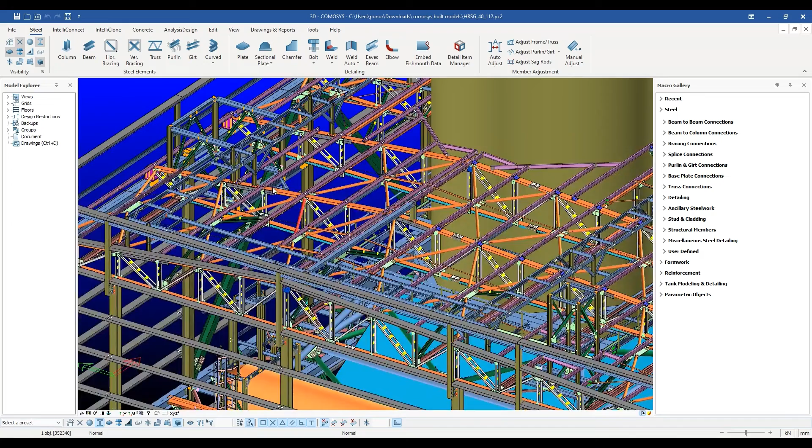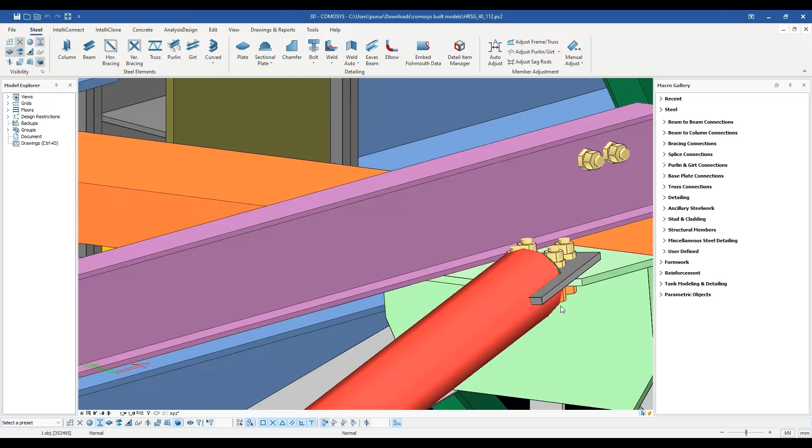Steel profiles are seldom used directly as they are bought from the rolling mills. More often than not, the profile ends will need to be cut, notched, coped, fitted, and sometimes openings need to be cut out from the webs.

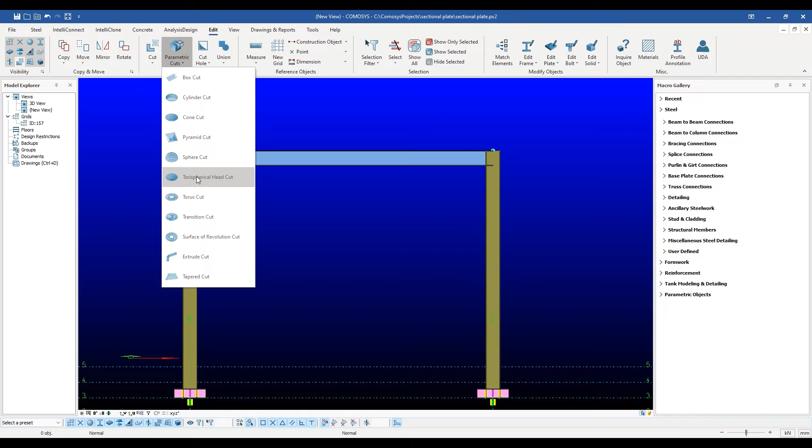In COMOSYS you will find an extensive array of commands to make the tasks of cutting steel or concrete shapes easy. These can broadly be classified as polygon cuts, fittings, part cuts, and general parametric cuts. In this video we will be talking about polygon cuts.

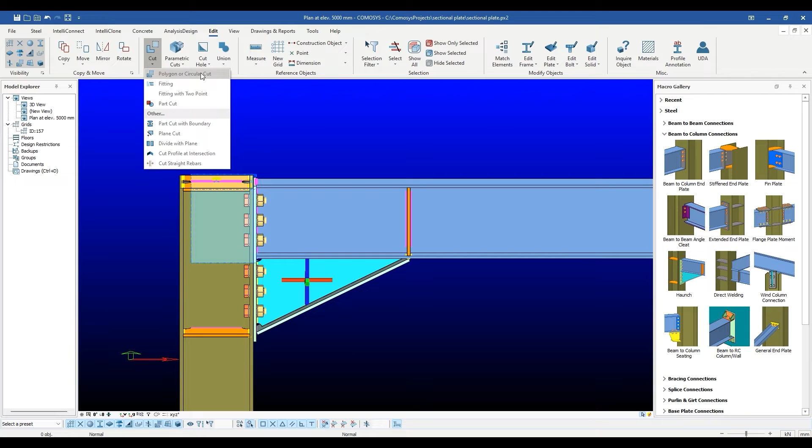The polygon cut is basically an extrusion cut of a general polygon or a circle. Let's say we want to create a notch as shown in this figure. We start the command by clicking the polygon cut icon.

A form opens up with an option to create a polygon cut or a circular one. Let's choose the polygon cut option. There is a depth variable here which tells COMOSYS how much this polygon will be extruded on both the plus and minus directions of the plane created by the selected points.

Enter a number which is suitable for the notch. Since we are trying to create a notch for the top flange here, with a notch depth of 40 mm, we can enter 40 here.

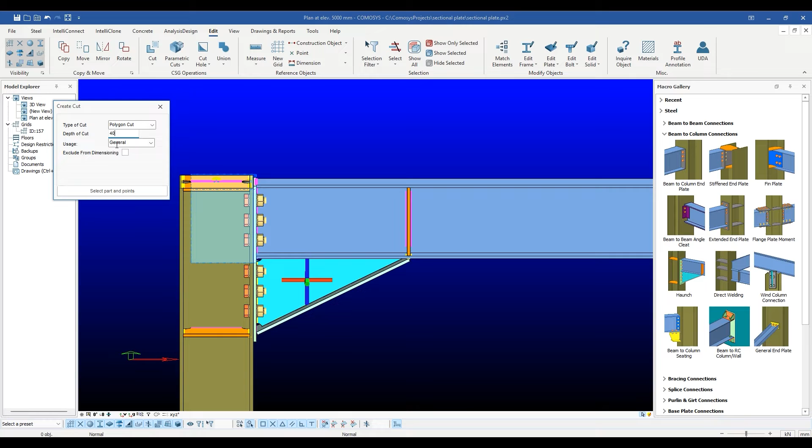Once we are happy with the settings, we press the Select Part and Points button. COMOSYS proceeds to ask us to select the part which needs to be cut. You can always look at the status bar below to read the prompts of various commands.

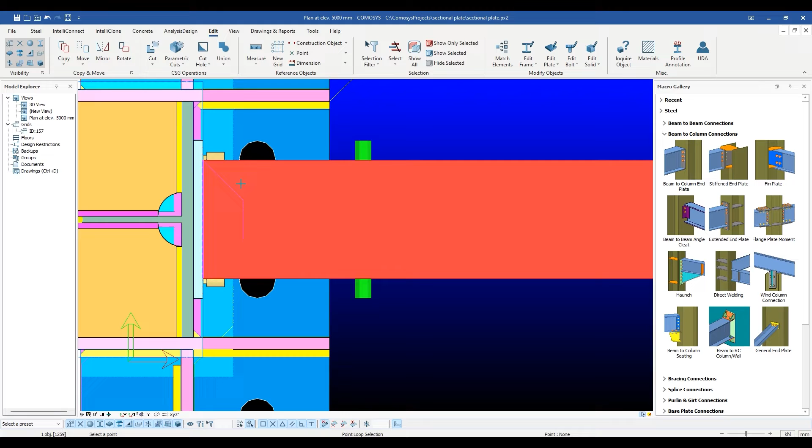After selecting the part which needs to be cut, the user needs to select some points. These need to be at least 3 in number. In our case we need 4 points. 2 are directly snappable on the part itself, and the other 2 can be snapped to using direct entry techniques, so no need to create these points. Just select them and then select the first point again to finish the selection.

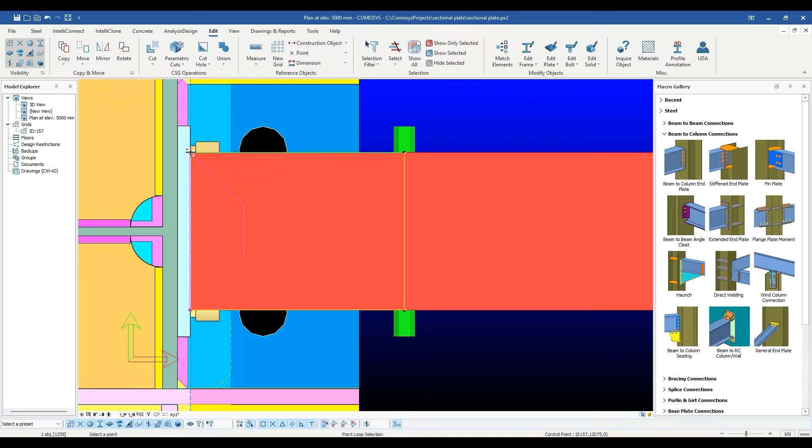It is easy to imagine how this command can be used to make a hole in the web of the profiles, or for cutting basically any polygonal shape out of the material. As can be seen, an actual cut object with blue lines has been created by COMOSYS.

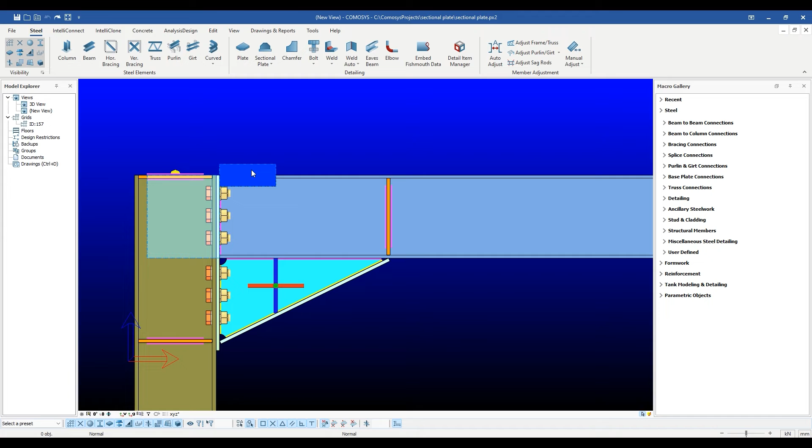This object can be selected and deleted if needed. The profile will revert back to its original shape. But more importantly than that, this cut object can be copied.

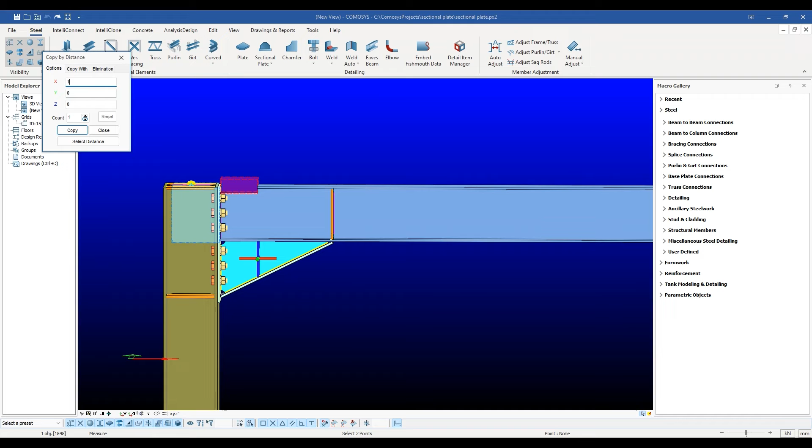So if we were to copy this cut object a distance of 1000 mm along the beam, we would create another cut object at that distance.

The cut object can also be copied to a different part. For instance, if we were to copy it to this point, where a different I-beam is waiting, the copied cut object would find its new owner and attach itself to it.

This feature of finding new objects to attach to is extremely powerful, and will be discussed in more detail in the video about copying, rotating, and mirroring objects.

Now let's try the circular cut option. In this case, the user is required to choose 3 points.

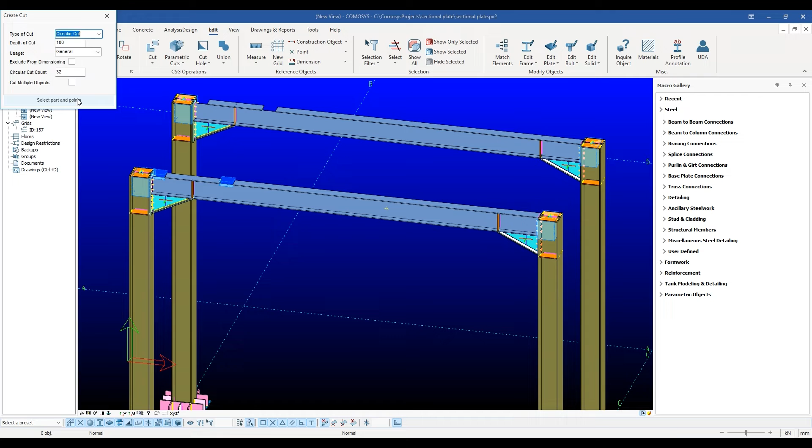The first point represents the origin of the cutting circle. The second point represents any point on the boundary of the circle, while the third point will define the plane of the circle.

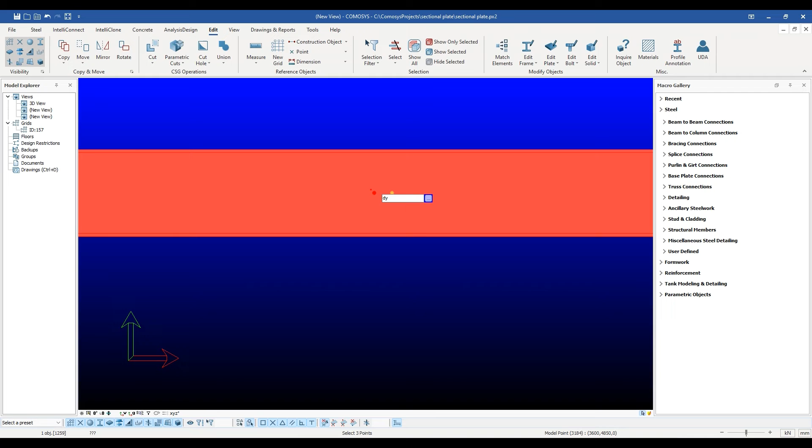There is also a section count here, which defines how accurate the circle will be. Usually a number around 32 gives a good result, but it should be noted that smaller numbers like 5 or 8 etc. can be used to create pentagons and octagons etc.

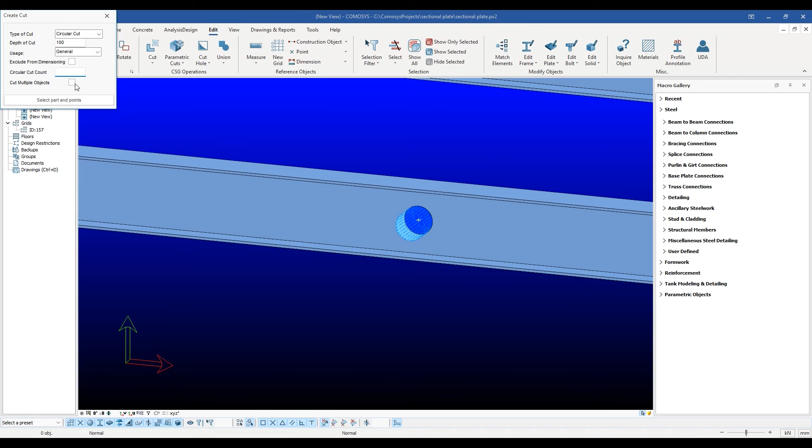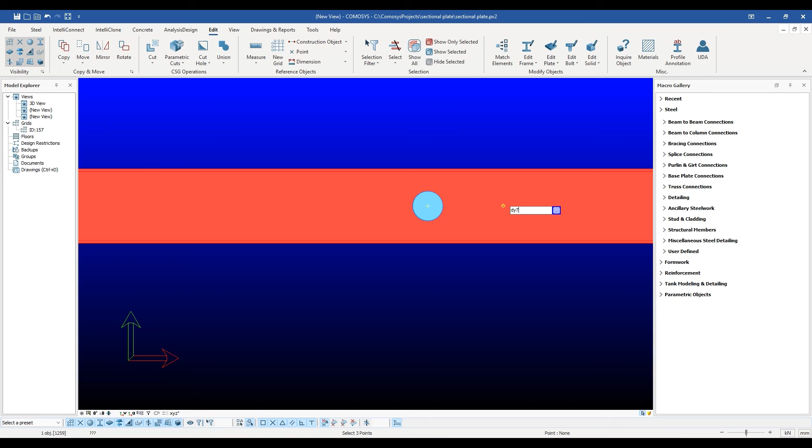Let's draw a polygon here by using the direct entry method. The choice of P2 will also define the rotation of the pentagons or octagons etc.

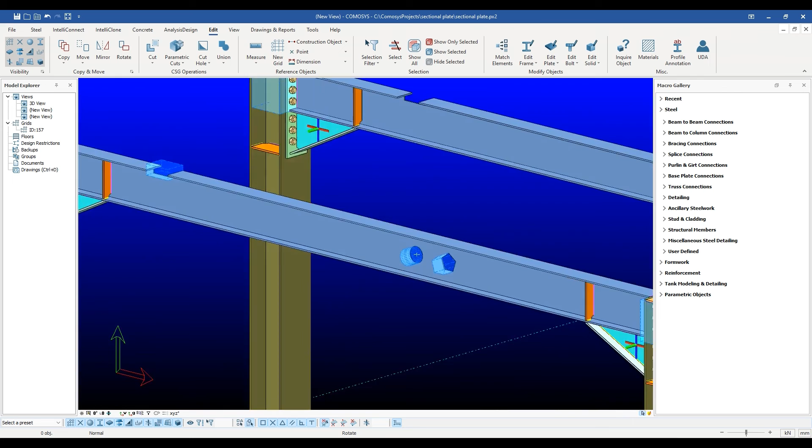As always, we can copy these openings in the profile along the profile or elsewhere.

Cuts are applied to the object in the order of creation. Deleting any will cause the whole object with all remaining cuts to be recalculated.

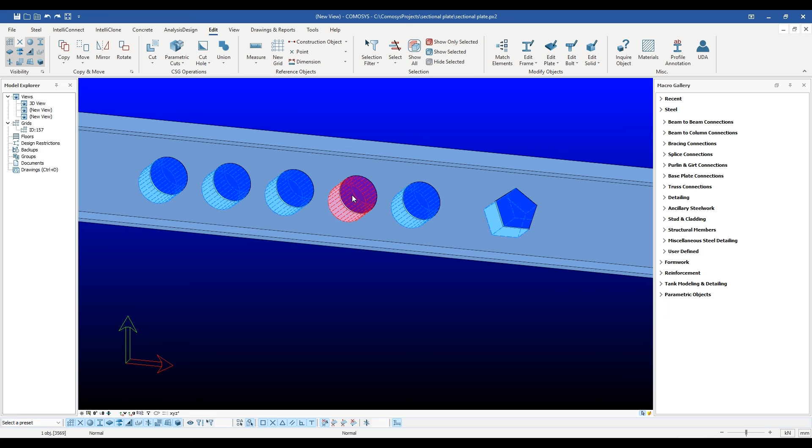Double-clicking on the cut object opens up its property window. In most cases, changing the properties of cuts is not needed, but there are a few properties of interest here.

We have the name of the cut, and two extra fields called Info1 and Info2. The user can enter any text here. This text can then be annotated automatically in the drawings.

So for instance, if you create a hole in a wall using a polygon cut, you can write 'window opening 800 by 1000' in this field, and then this text can be written next to the opening in the wall in the concrete drawings.

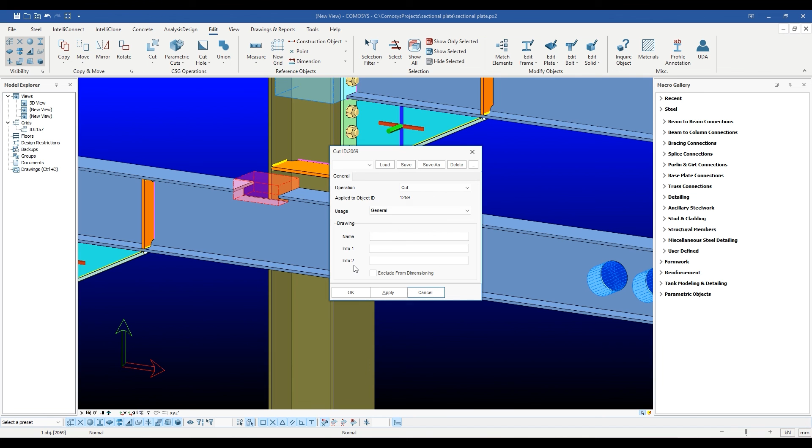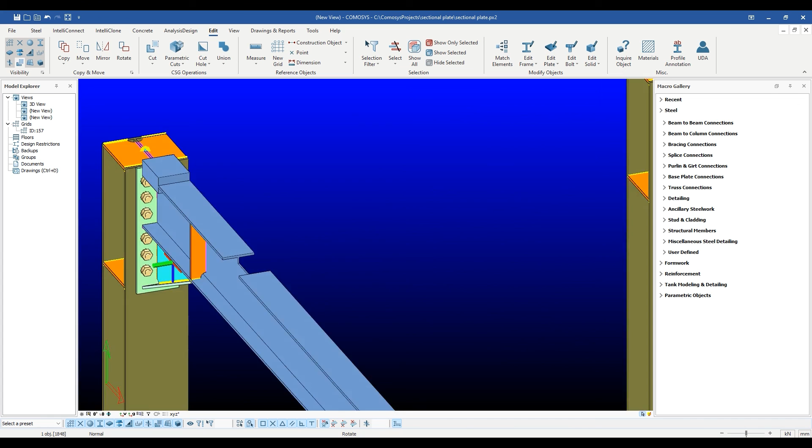One final point worth mentioning is this cut union property. Any cut can be converted into a union object as well by changing this property. Similarly, a union object can be converted into a cut object as well.